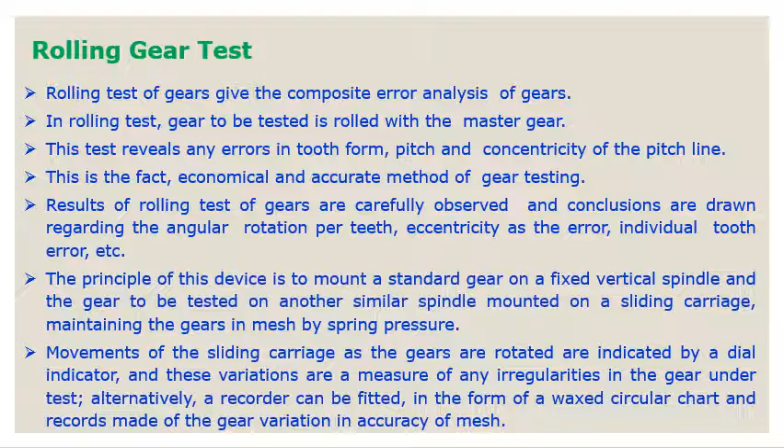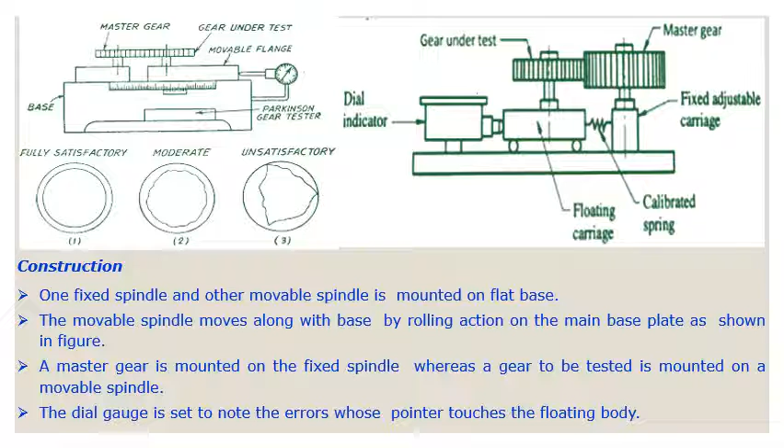This is how the gear roll tester works, or the schematic diagram you can observe in this slide. One side is connected to a dial indicator, in which the measurements are taken. This is the master gear fixed over a spindle. In mating with this, the gear which is to be tested is mated and it is fixed on a sliding spindle.

The master gear is fixed on a fixed adjustable carriage, whereas the gear under test is fixed on a sliding carriage which is floating, and this floating carriage is directly connected with the dial indicator.

So the Parkinson gear tester can be used for measuring the variation in center distance of two gears caused by error in the tooth form, pitch or concentricity of the pitch line, as I already mentioned. During the measurement, the variation in the gear can be plotted over paper with the help of dial indicator readings, or directly we can plot it.

So this is how a fully satisfactory or moderately satisfactory gear profile looks, and when this variation is observed, the gear which is tested will be rejected.

Construction of this kind of gear roll tester: a master gear or standard gear is mounted on a fixed vertical spindle, and the gear to be tested is fixed on another spindle. Both are mounted on a flat base. The spindle of the gear under test is attached to a floating carriage.

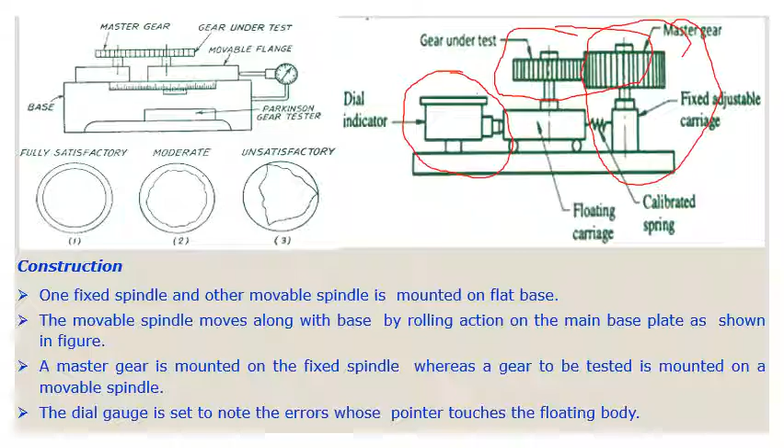For the working, when the master gear is rotated slowly, the gear to be tested will also rotate because of their meshing. Errors in the manufactured gear cause the gear to move away from the center line of the spindle.

When the gear under test moves, the floating body also moves by the same distance. Because of the displacement of the floating body, the dial gauge gives the displacement. The variations in the readings can be observed and plotted in graphical format as we have seen in the last slide.

In other words, initially, using gauge blocks between the spindles, set the dial gauge to read 0 at the correct center distance. Also adjust the spring pressure and set limit marks on the dial gauge. Later, mount the master gear and gear under test on their respective spindles and observe the variation in the dial gauge reading when the gears are rotated.

Once the readings are obtained, the variation readings can be observed and plotted in a graphical format, or if the readings are within the acceptable limit, the gear is selected, or else it is rejected. Further, an electronic recorder is also fitted on the instrument. It shows the variation in center distance in the form of a waxed circular chart.

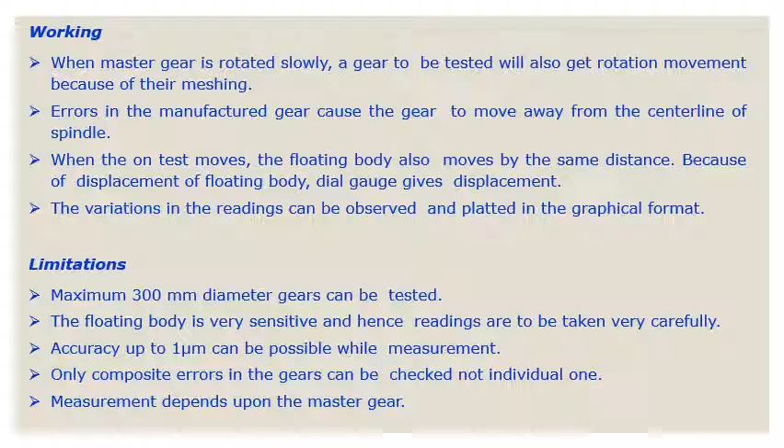Next is about involute measurement. Involute is a curve plotted by a point on a straight line which rolls around a circle without slipping. Better you refer the design data handbook or design textbook to understand involute better, because when you understand the involute, how the measurement happens can be understood properly.

Involute measurement is done by profile projector or by involute measuring machine. In this video I am discussing the basic principle based on the involute measuring machine. This machine helps to check the involute profile of a gear. It simply marks the generation of involute curves of the base circle.

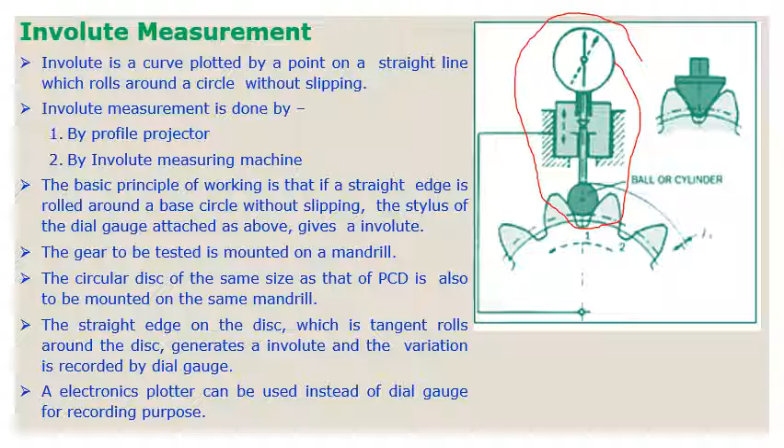Next is about the pitch measuring machine. Here the circular pitch of the teeth measured on a base circle is called the base pitch, and is measured by different methods, like the step by step method or the direct angular method. What I am discussing right now is the direct step by step method.

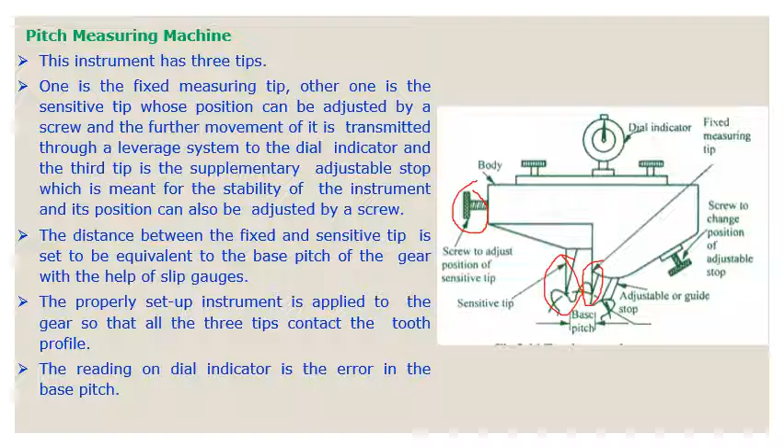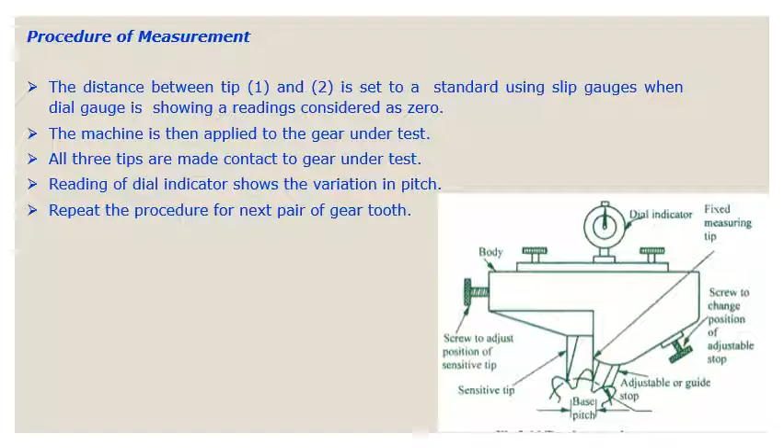The distance between tip 1 and tip 2 is set to a standard using slip gauges. When the dial gauge reading is considered as 0, the machine is then applied to the gear under test. All the three tips are made to contact the gear under test, and the reading of the dial indicator shows the variation in pitch. Repeat the procedure for the next pair of gear teeth. By that way, the errors in the successive teeth can be calculated.

Further, there are two more parameters with respect to gear measurement. One is the runout measurement and another one is the concentricity measurement. Runout means the eccentricity in reference to the pitch circle. Gears that are eccentric tend to have a vibration per revolution. An eccentric tooth may cause an abrupt gear failure. That's why the runout in gears is measured by employing gear eccentricity testers.

The gear is held on a mandrel in the centers and the dial indicator of the tester possesses a special tip depending upon the module of the gear being checked. The tip is placed between the tooth spaces. The gear is rotated tooth by tooth and the maximum variation noted from the dial indicator reading gives the runout error. By that way, eccentricity in reference to the pitch circle is calculated, which is termed as runout error.

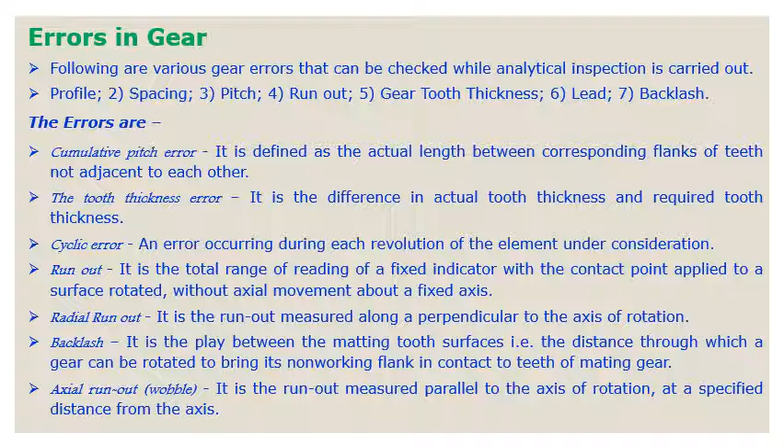Backlash error: it is the play between mating tooth surfaces, that is, the distance which a gear can be rotated to bring its non-working flank in contact with the teeth of the mating gear. Further, it is caused by the errors in the gear profile, pitch, thickness of the teeth, etc. So here you can see the different types of errors in the microgeometry of gears.

Generally, under form errors, profile error and lead error occur. Under location errors, pitch error and runout error occur. In the profile error, there are profile form errors, total profile errors, and profile slope error. These errors will cause noise during service or operation. Lead errors include lead form error, total lead error or lead slope error, which have a detrimental effect on load carrying capability, that is, load carrying capability will be reduced.

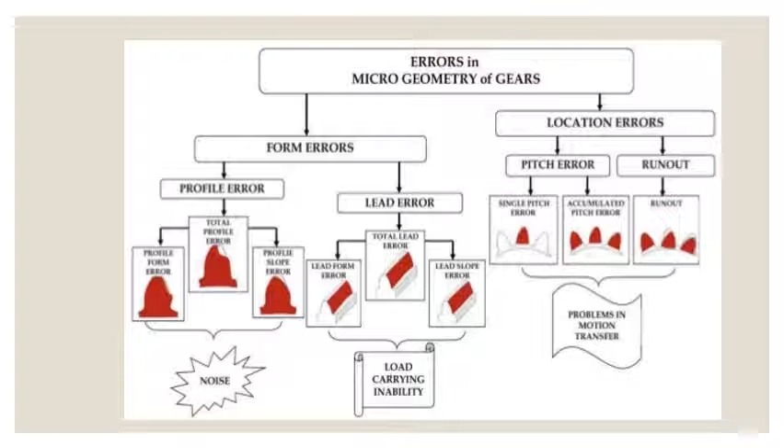Whereas location errors are about pitch error, either a single pitch error or accumulated pitch error, or we can calculate the runouts. These runout or pitch errors in total cause problems in motion transfer. So pitch errors or deformation of a gear tooth, these are the causes. So the tooth contact patterns, how they look, you can observe in the corresponding row. Similarly, lead errors due to torsional deformation of both the shaft and the transmission case, you can also observe here how it occurs. Simultaneous occurrence of both profile and lead errors in the gearbox, modification of the objective teeth.

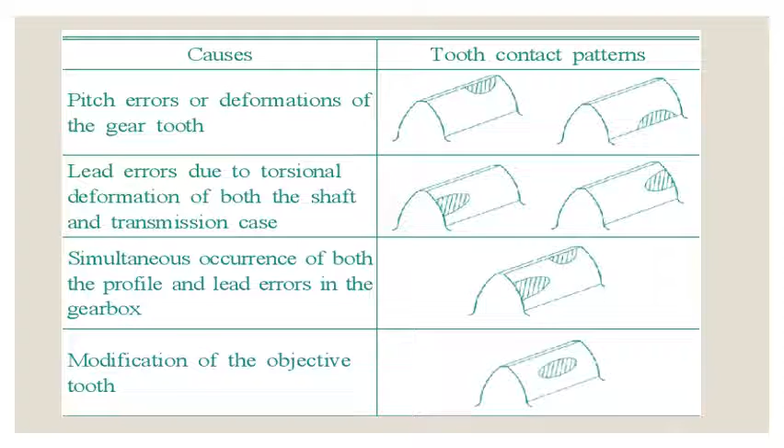So this is the end of module 3 as per the video syllabus. I hope I covered almost all the topics mentioned in the video syllabus of module 3.